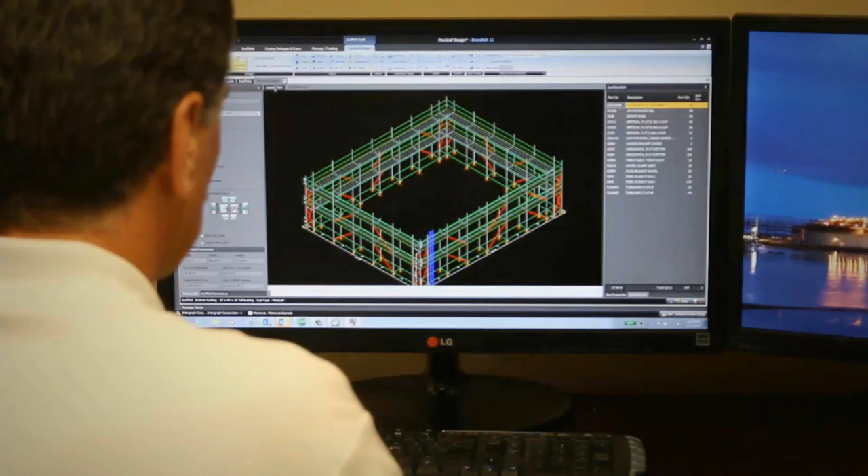Intergraph Process, Power and Marine is the acknowledged world's leading provider of enterprise engineering software, enabling smarter design and operation of plants, ships, and offshore facilities.

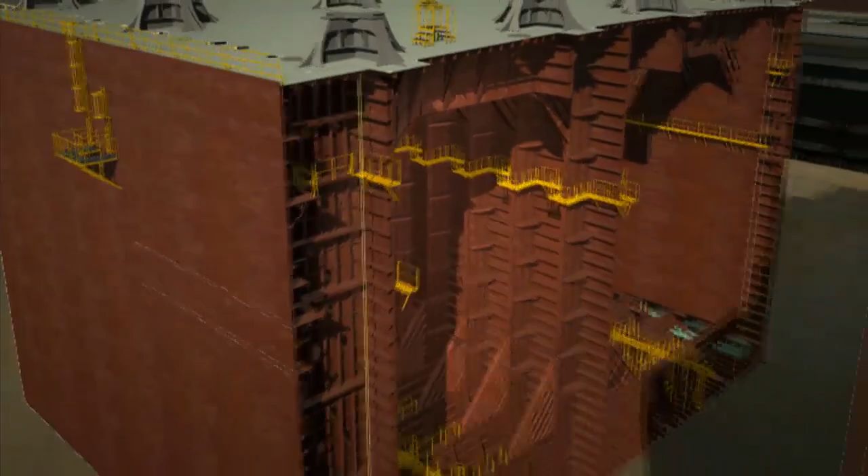At the forefront of technological advancements, Intergraph consistently delivers next-generation solutions to meet challenges, making boundaries that were previously huge obstacles seem insignificant. Intergraph helps you go beyond boundaries and create the future of engineering today.

As one of our key technology suppliers, Intergraph has factored significantly into our ability to deliver. We work with Intergraph's technical user forums, as well as jointly developing some projects with Intergraph. The idea is to have smart plant construction ready to integrate all these departments with the necessary agility and allow us to access information easily in a 3D model, which makes our management activities much easier.

The old model just doesn't work. We require an increased level of support from vendors like Intergraph to help these systems work together, to help us troubleshoot issues that may originate in systems which we don't have experience with, or that may use other third-party tools but are still required to execute the job.

From modern engineering marvels to everyday operations, Intergraph is helping our customers do more than ever before. Design efficiently, build smarter, operate safely, achieve more. Go beyond boundaries.

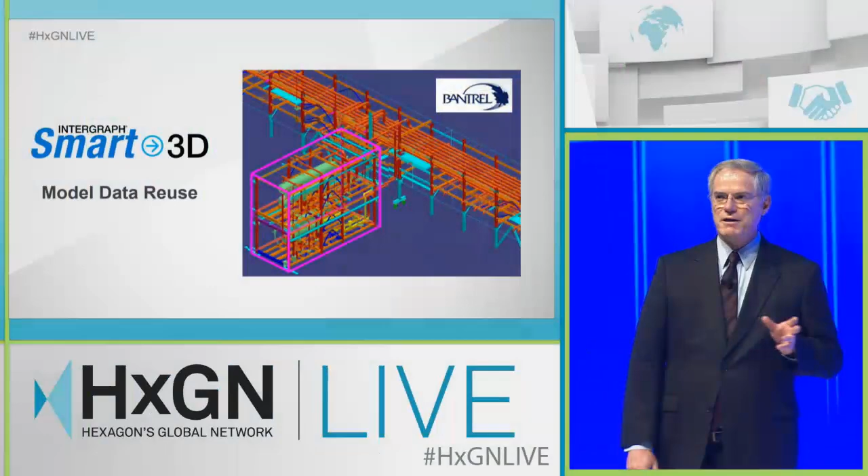Last year, we talked about Bantrel. They're a company that's owned by Bechtel in Canada. We also talked about Saipem, who's using MDR on very, very large projects to save a lot of time and money.

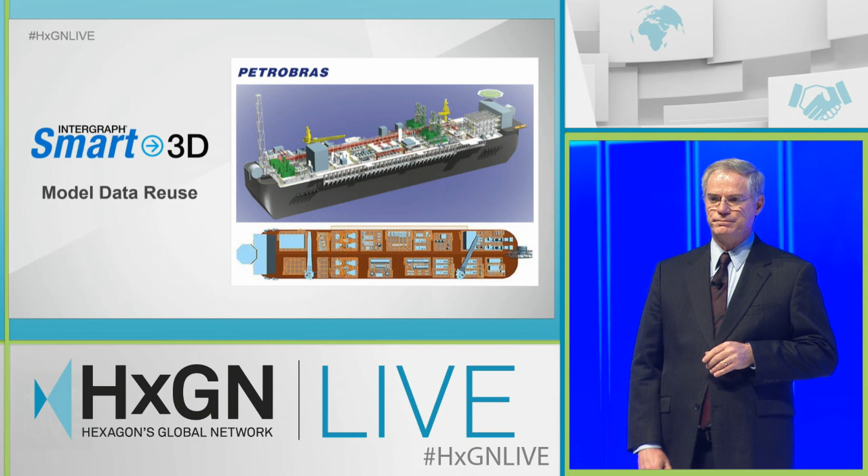Today, we'd like to talk about Petrobras. They are standardizing on Smart 3D for a massive collaborative project. Let's look closer at this FPSO project. There are 6 hulls that are similar with 6 different topsides and 80 modules. Please be sure to go see the session Thursday in room 313.

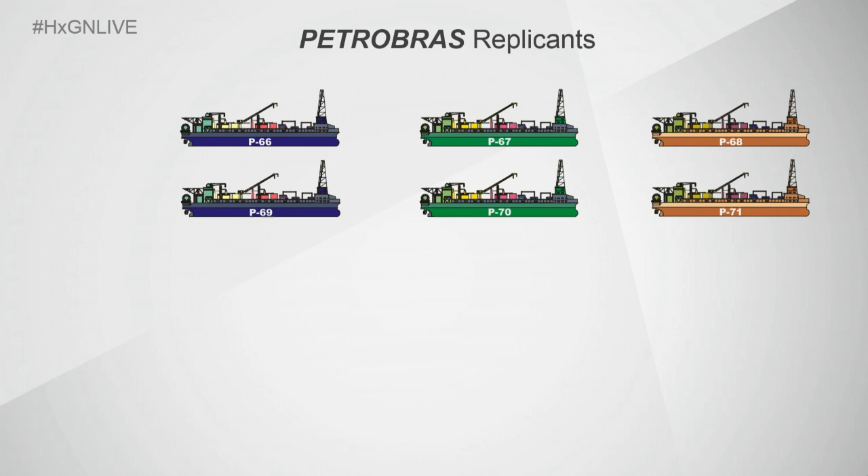These 6 FPSOs are very similar, and they're numbered from 66 to 71. And let's take a look at the contracting strategy that they've employed. First, the hull design and construction was given to Ecovix.

And then they had 3 integration contractors whose responsibility is to design and construct some of the topside modules and integrate the hulls from Ecovix, including a partnership of Keppel FELS and Promon, another one of Mendes Júnior and OSX, and the Jurong Shipyard.

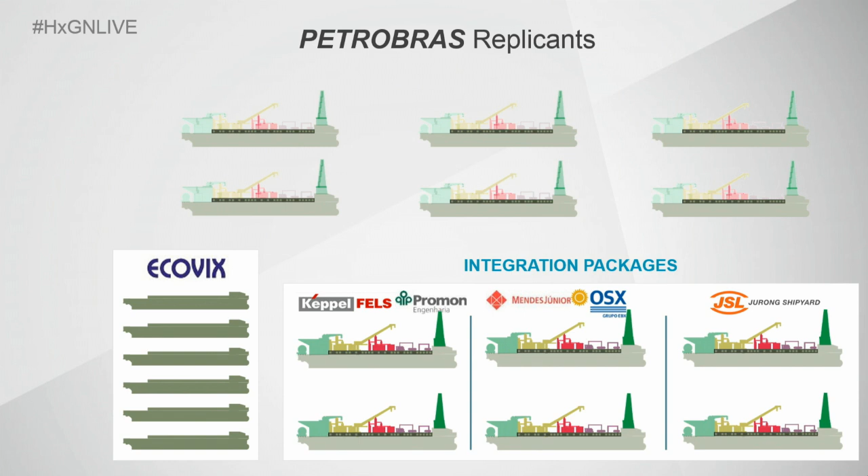The topside module design and construction were further subdivided into these EPCs, ESA, Tomei, and TKK. Now, here's where major design reuse comes into play.

The same model was used in global workshare between Ecovix and Keppel FELS. And you can see that Keppel FELS Promon designed one of those modules. ESA, Tomei, and TKK worked on their respective designs through global workshare on the same database.

And now here's where it really starts to get interesting. The second FPSO from Promon and Keppel FELS, Ecovix copied their design into the new model. And then Promon used MDR to replicate the entire topside model to the second FPSO.

Ecovix uses their design for OSX Mendes Júnior. The EPCs use MDR to create their models for the integration contractors. And those contractors use MDR to create their second vessels based on that MDR. You can see here that the combination of having global workshare and MDR together, working together, is really, really efficient for our customers.

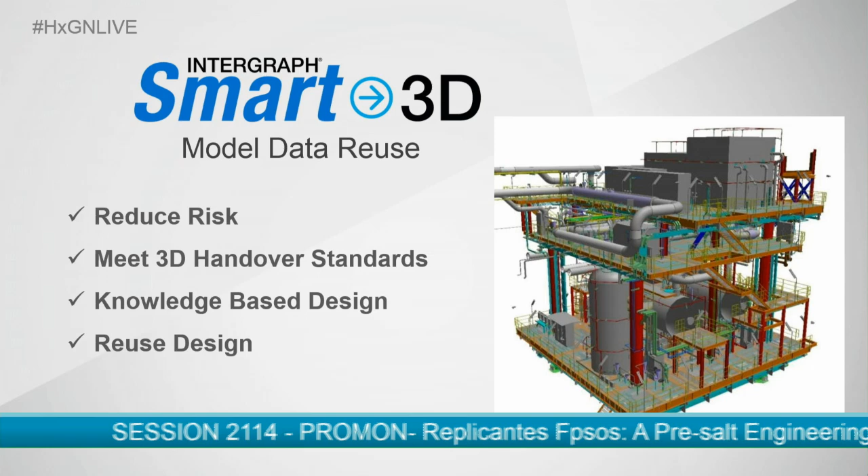What's behind all of this is Smart 3D with global workshare and model data reuse. And that's allowing our customers to manage the risk in these massive collaborative design projects.

Rogero Pinto of Promon reiterates how important Smart 3D is to saving man-hours and ensuring consistency.

So today, EPCs, several of them anyway, still switch 3D design system from project to project. Sometimes they switch because of a particular project type. Maybe it's offshore and oil and gas, and they switch between those two. Sometimes they switch because they have a particular location that got the job, and they have expertise in a specific system. Or sometimes they switch because that's what the owner is requesting, is a particular deliverable. All those are historic reasons why they kept multiple systems. But is that really necessary today?

What we saw last night was the Red Bull race team. It was pretty incredible. You know, if you blinked, you missed it. They had a pit stop, and because everybody was focused on that one type of car, it was unbelievable. They set record time at that pit stop.

What if you suddenly changed their car out? Do you really think that they're going to be as performant? Definitely not. Instead, they remained and have a focused expertise on a single car type. And that is what allows them to optimize their people and their work processes to get the very highest and best performance possible. They have that continuous improvement that they use on these cars from race to race and year to year, and they get better and better at it.

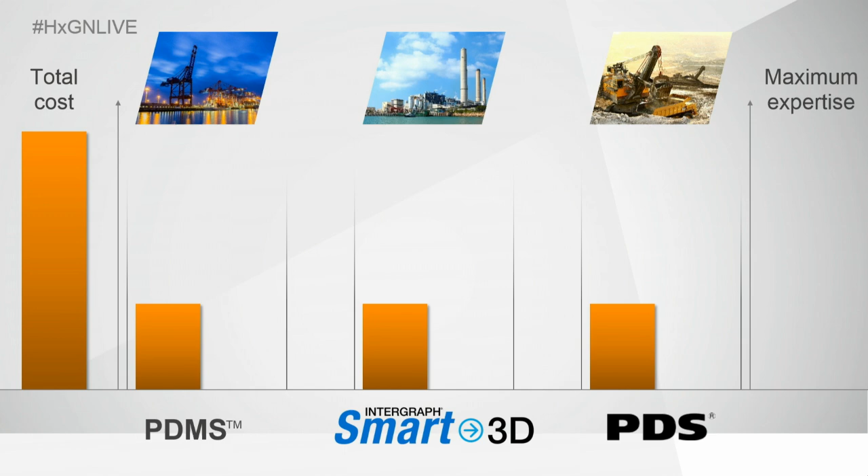Additionally, you've got to train people on that, and that's ongoing training cost. Many people don't invest in additional follow-up training, but you really should, because we're adding capability all the time. And if you aren't getting that follow-up training, you're missing something.

Also, you have IT costs that go up, because for each one of those platforms, you're going to have your own internal systems that you need to integrate with, which means you're going to be creating all of those integrations yourself, and you're going to have to maintain those going forward, doing multiple of those all the time.

Additionally, unlike racing teams, you have your best people spread across multiple 3D platforms. That means you're really not getting the efficiency opportunities out of all of your people, like defining the best rules for your system, getting automation in place, optimizing your work practices, and also that continuous improvement that you can get from all of your global organization, really focusing on one set of tools.

But if you focus on Smart 3D as your single design platform, you can change that. Your costs will go down, your efficiency and your experience and your knowledge are going to be able to go up, and this is from a global perspective. And you're going to have opportunities for a lot more success than you've ever had in the past.

Smart 3D as your single design system, along with SmartPlant Interop and our export capabilities - if you use those three things together, you can join other people that have made that switch. Agility Group, they've been here, they made the switch to a single design system about 4 years ago. They've spoken at this conference every year for the past several years and told you of their experience.

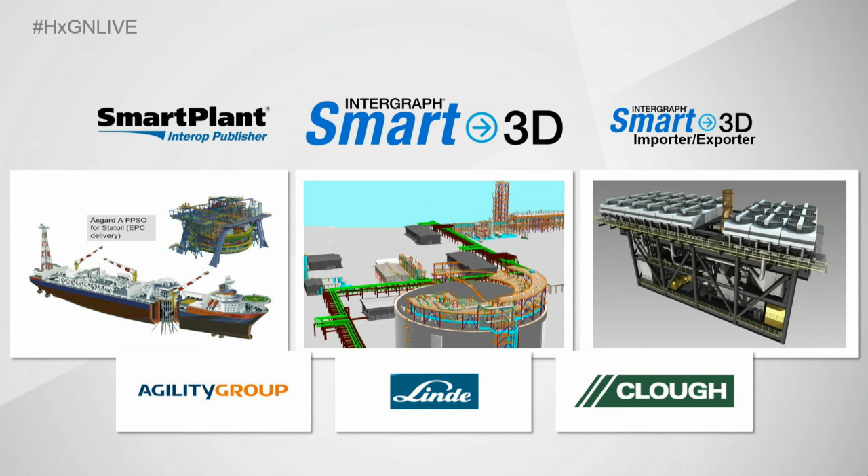Last year, Linde from Germany spoke. They used Smart 3D as their detailed design, but then handed over in a different format to the owner-operator at the end of the project. And this year, you're going to be hearing from Clough, who has made the decision to switch to Smart 3D, and they started that last year.

Clough's portfolio of products and expertise consisted of a number of products that you see listed. Like many of you, Clough wanted to leverage their existing data and designs while moving to Smart 3D at a pace that worked for their organization.

In their first project, they actually received the feed model from a different EPC that used a different design system. Now, in this case, the delivery did not include things like specs and those types of things, so they weren't able to do a full translation. But they were able to use SmartPlant Interop Publisher to leverage all of that information into Smart 3D and use it as a reference so that they could do their detailed design.

Additionally, they use legacy designs, reusing data from legacy designs, and some contractors use different tools. Again, they were able to use SmartPlant Interop Publisher to bring all of that information in - the graphics, and more importantly, the data. You've invested in that data. With SmartPlant Interop Publisher, you can bring that data forward as well and use it as a reference as you continue to do design. So Clough continued to do their development of the design in SmartPlant 3D, but they were able to leverage all of that great information that they had, either from their contractors or their legacy data.

So a side note, kind of, but I think it's really important. From an efficiency standpoint, the models that got converted using SmartPlant Interop Publisher - the exact data and graphics can be used directly by all of our other products. So if you're using the Enterprise, this is going to bring the cost down because you'll be able to use all of that data in all of our tools.

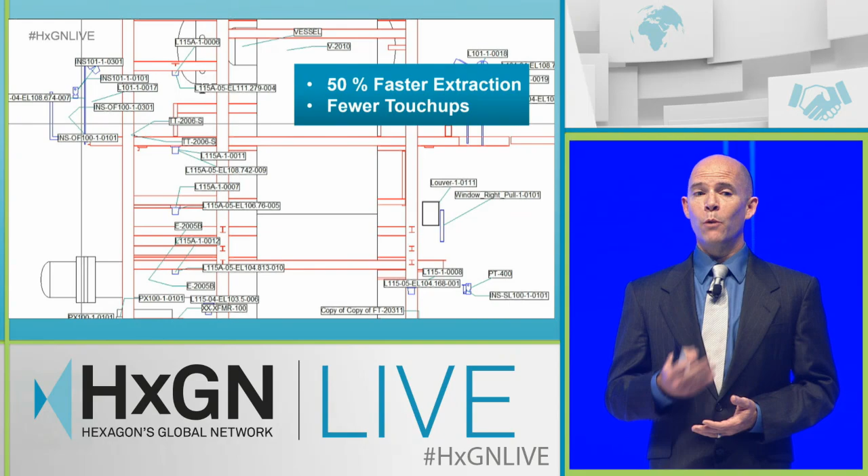In addition, one of the major changes was the full upgrade to 64-bit, and we now have 50% faster extraction on drawings. If you see the new version of Smart 3D, you're going to see hundreds of small improvements made to remove these touch-up efforts, and I'd highly encourage all of you to take a look at it.

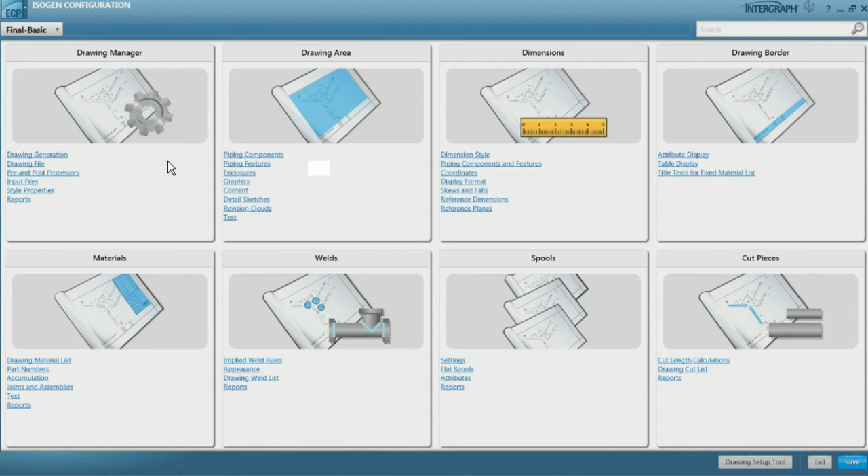Another change we've made at the behest of many users, particularly executive management, is to begin looking at how we can reduce cost of ownership. Specifically, we focused our UX, our user experience design teams, on the administrative functions of some of our applications. Isogen has been the first one to execute this and release.

If you look at the newest version of Isogen, you'll see an entirely new administration module that is all graphically driven. It's very intuitive, so there's no typing in of secret codes or anything like that. Everything is documented within the software, so you don't need to go and read documentation - you can see graphical depictions of each different type of choice you would want.

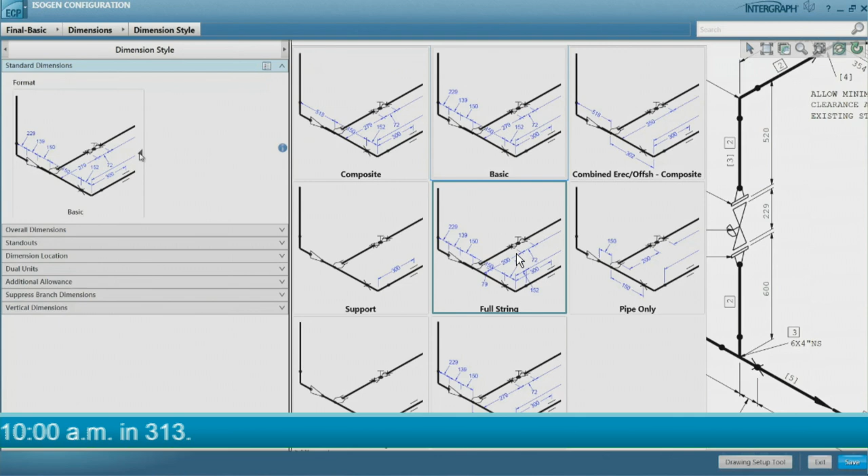There are many, many choices, as those of you who deal with drawing configuration know. For example, with dimensioning, you could choose composite dimensioning, basic dimensioning, or full string dimensioning. Once the administrator chooses one, you can apply it to the drawing and see what the change will be, to determine if you'd like to keep that or go backwards. This makes it very easy - it doesn't require so much work from the specialist. They can focus more on the quality of what they're doing and less on how to operate the software.

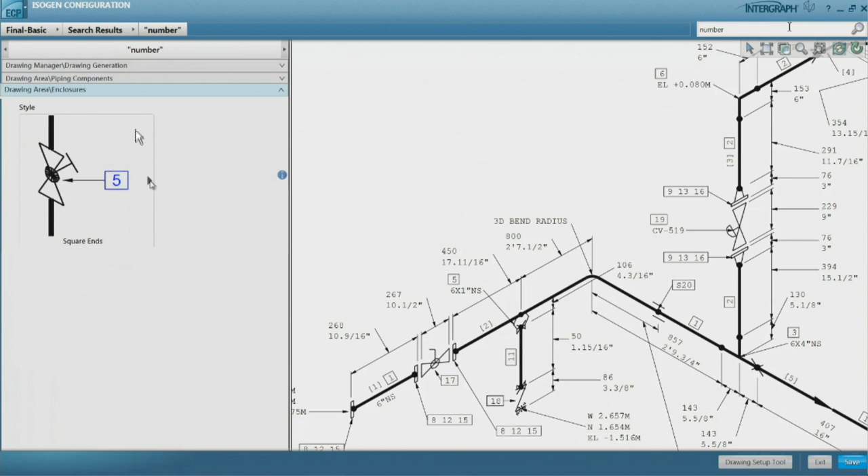Likewise, another example was the way they changed the numbering. Numbering styles can be changed, again all graphically, and then the user can simply decide if they want to commit to that or not. One of our clients, Cesar Matos, said it perfectly - they expect their configuration costs on drawings will go down by 25%. In other words, they can do it 25% faster as a result of the investments we've made to reduce cost of ownership for our clients.

Recently, owner-operators told us that 90% of the projects they award are below $10 million. For these small to medium-sized projects, customers face the same pressures that the larger ones do - tight deadlines, squeezed resources. They are required to deliver high quality, on time, with accuracy.

In this example, Richard Design Services designed a 10,000 barrel a day facility. This was the largest renewable diesel facility in the United States, and they used CADWorx, CAESAR II, and SPI. They were awarded the Drivers of Success Award from CADWorks.

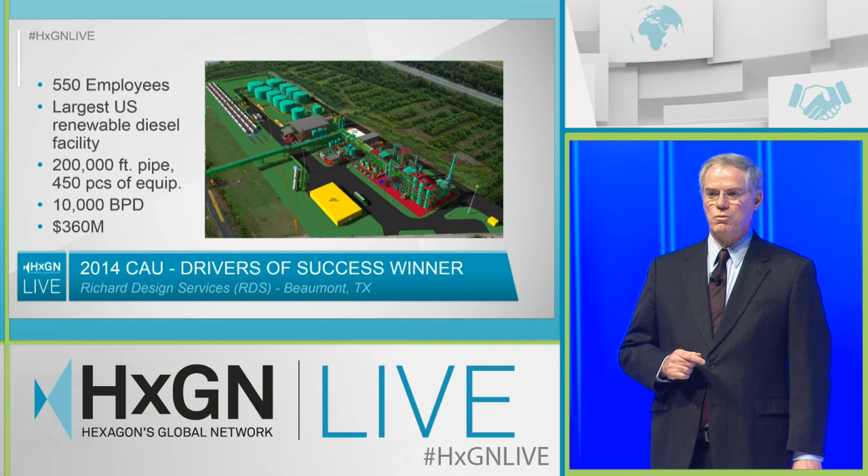Michael Tran shared how they reduced their project engineering time by one-third using CADWorx.

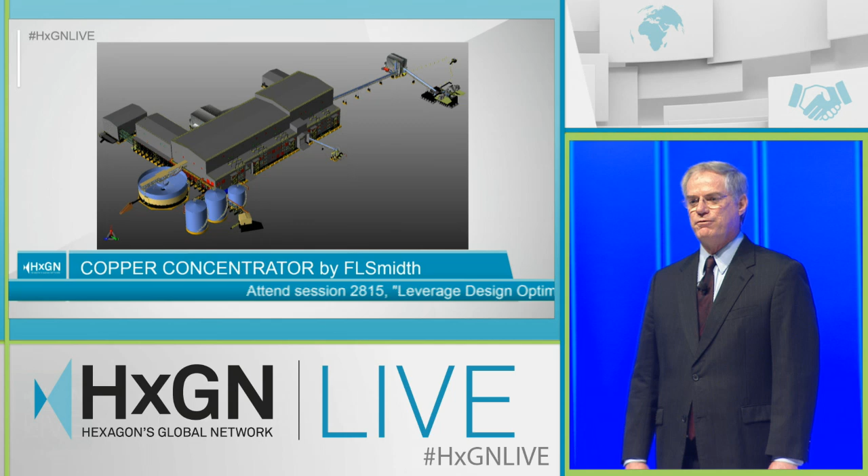CADWorx is a great tool with applicability in many different industries. FLSmidth uses both Smart 3D and CADWorx on their mining projects where appropriate. They're also a winner of the Drivers of Success competition and have been working with us for many years, so they know the right time and place to use the capabilities of CADWorx and Smart 3D on a project of any size.

Javier Barros shares about their success with CADWorx, and how the flexibility and adaptability has significantly helped their profit.

Smart Plant Enterprise Master Tag Registry is a new integration product we're releasing that we've been working on. We think it's going to really improve your business, especially given the interest EPCs have shown in this product so far. This week you'll hear about our full vision for MTR.

We're going to release it in a phased approach. It's currently in beta with our premier partners, and we expect to release it in October of this year.

I think we can all agree that managing tags and their data is critical to any project's success. We also know there are significant challenges in doing that because project size and complexity have increased, and the timelines to get it all done have certainly shrunk. Consolidating and managing all that change is complex and time-consuming.

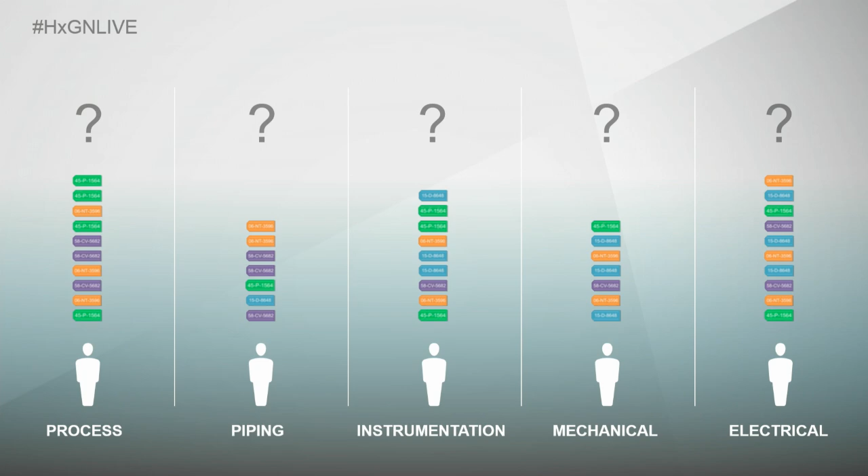Today there are some very difficult questions that are complex and hard for you to answer. Who owns what? Who's changed what? What tags are no longer valid, obsolete, or have changed? And without consistent tag numbering, can you really track progress like you want, or manage materials, or even effectively coordinate changes between your departments or disciplines?

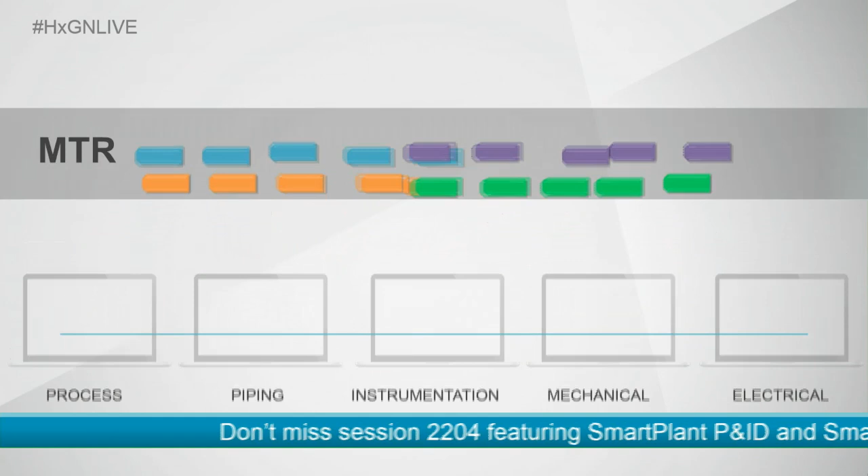Smart Plant Enterprise Master Tag Registry is going to help you answer those questions a lot easier than ever before. Master Tag Registry collates and organizes your tags created by all parties into a master registry, which becomes your single source of truth on any project. It's accurate, consistent, up to date, and accessible by everyone on the project.

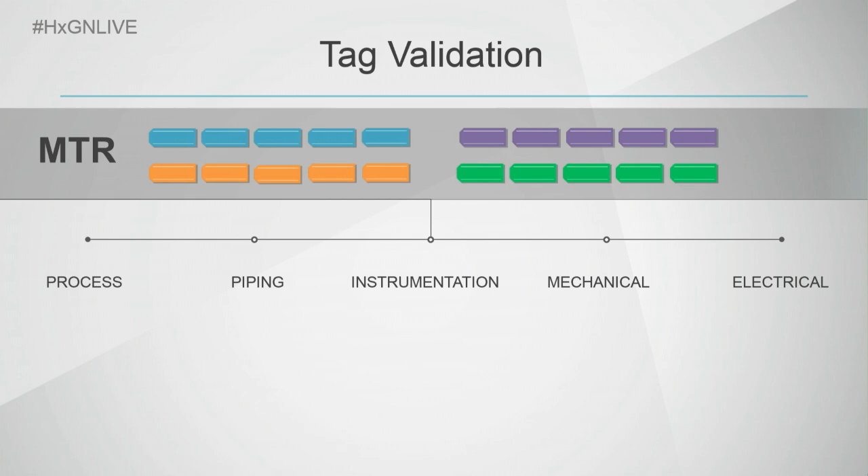With our automated tag validation, you'll be able to check for inconsistent, obsolete, and renumbered tags, and the system will help you correct those. As the enterprise is used, the handover information is collected and ready for handover.

Project engineers and leads can easily track their progress and the number of tags that have been created on the project.

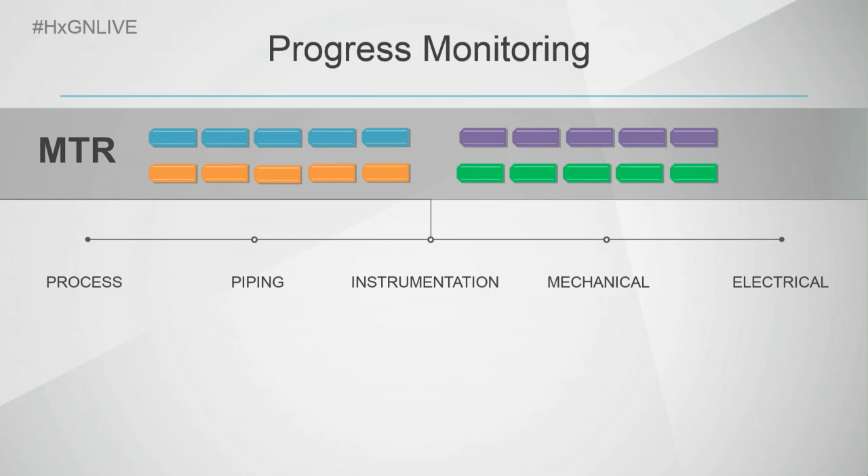Companies like yourself actually helped us put together the business case for this and the likely savings you're going to have by using it. If on a project of this size you assume that 5% of your tags are done incorrectly, then the potential savings are really significant.

By reducing time to correct tags, you're going to save around $400,000, over $250,000 due to less time spent looking for tags. And because Master Tag Registry creates an automated register for you, that's estimated at $900,000 in savings. So conservatively, you're looking at a total of about $1.6 million in savings. The story is pretty compelling.

Thank you, Melanie. Now I'd like to talk a little bit about visualization, something Intergraph is well known for in the industry. We've worked with you for many years to create visualizations long before those real assets exist out in the field. Those have been used in a wide variety of work processes, from pre-sales of asset concepts to executives when the project is still being sold, through design so people understand the overall layout of a plant or facility, operations and maintenance walkthroughs, constructability walkthroughs, and even during the operations and maintenance phase.

I think it's fair to say that if a picture is worth 1,000 words, a good 3D visualization could easily be worth $1 million. Not that we're making any suggestions on pricing, by the way. But it is very powerful at getting lots of people to understand the same concept at the same time.

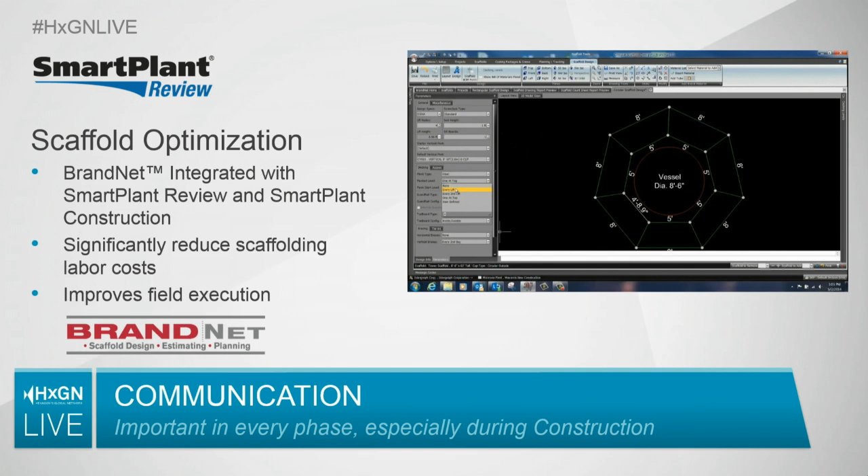Another area where we've had innovative success with visualization was working with a company called Brand. Brand is actually not a software developer at all—they do scaffolding for a living, a scaffolding contractor. They have an in-house system called BrandNet, which is how they do the detailed design for all their scaffolding so that when they go out in the field, they have all the right materials and everybody knows what to do.

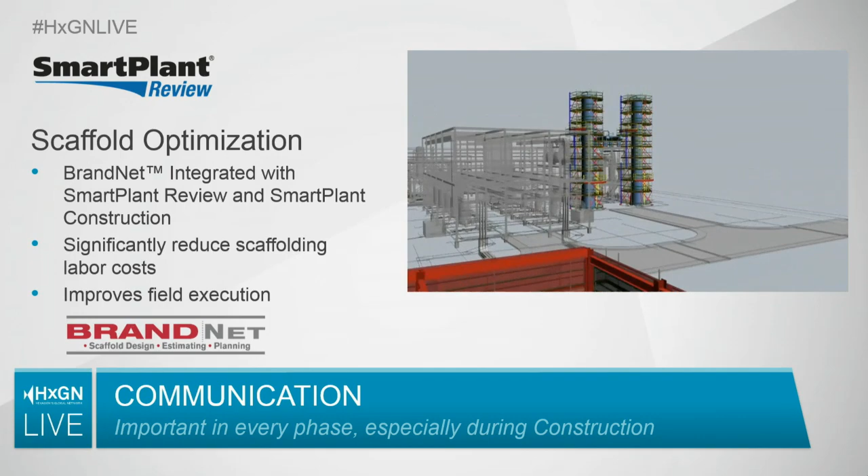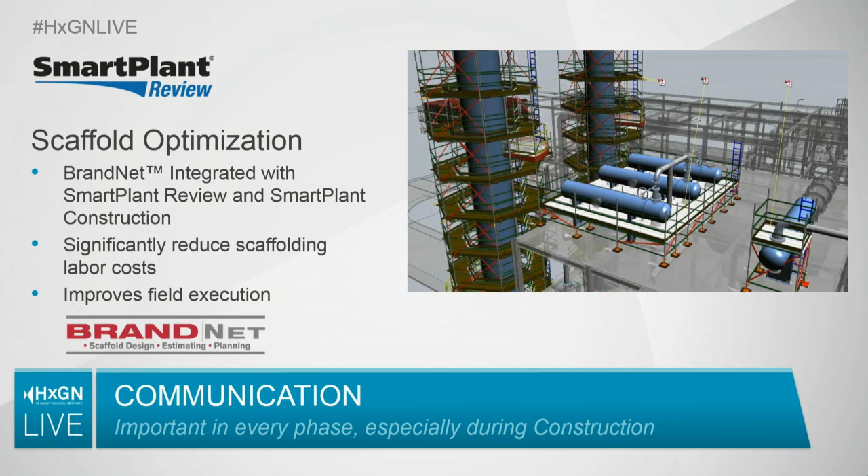They use Smart Plant Interop so they can work with their customers, the main contractors, to publish those scaffold models into the master model, so the crews can see the whole thing laid out together—how that detailed scaffold model fits in with the intended full-size 3D model. This helps crews be more efficient because everybody understands how it will all work together, and it improves safety because when everybody knows their job, it creates less risk out in the field.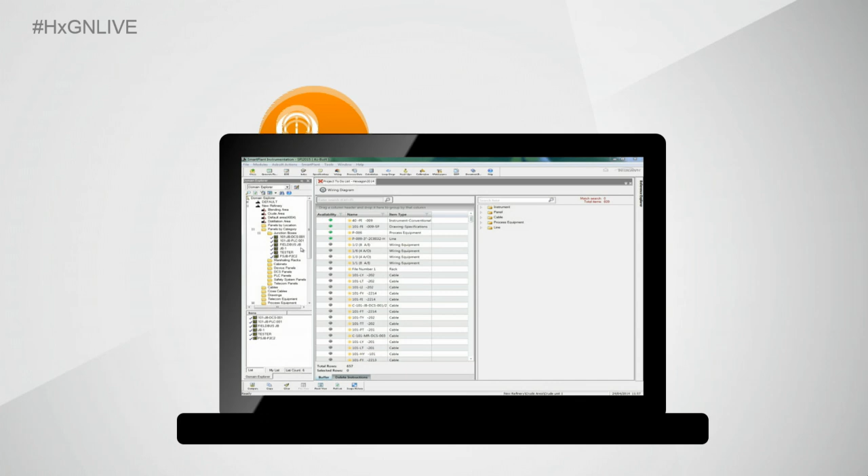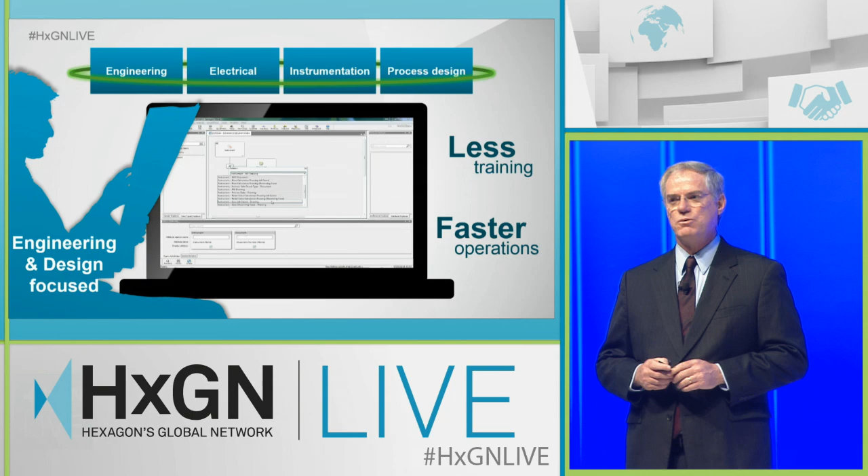Now let's take a look at the work we've been doing on SmartPlant Electrical and on instrumentation. As Patrick talked about, we're focusing on user experience, and in particular in the E&I area, we've worked on making things easier and more intuitive so you can find, create, and edit data. This update has been driven by an engineering approach rather than an IT approach, so it'll speak the language you understand. We're looking to harmonize tasks across the different applications in the schematic suite so you just need to learn things one way and one time.

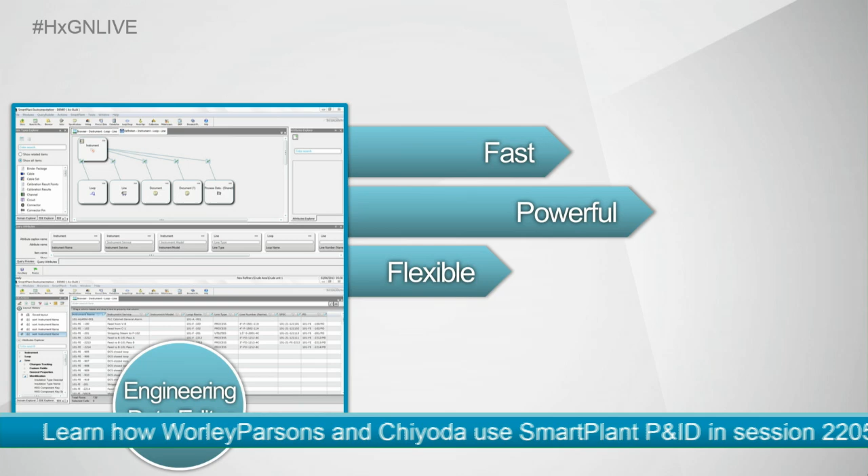We've added a graphical query builder that speaks the engineering language and allows you to graphically and intuitively lay out the information you want to see. We've also extended the engineering data editor across the suite, providing powerful editing and searching that works just like Excel, with sorting, filtering, and cut and paste.

We've been listening to our electrical customers who had requirements for case management where they needed to work for safety and design reliability on different conditions. So you can now look at the startup case or the shutdown case and keep track of those.

We've also added the ability to manage changes at the component level. And we continue to provide support for analysis of your design by going through our integration with ETAP.

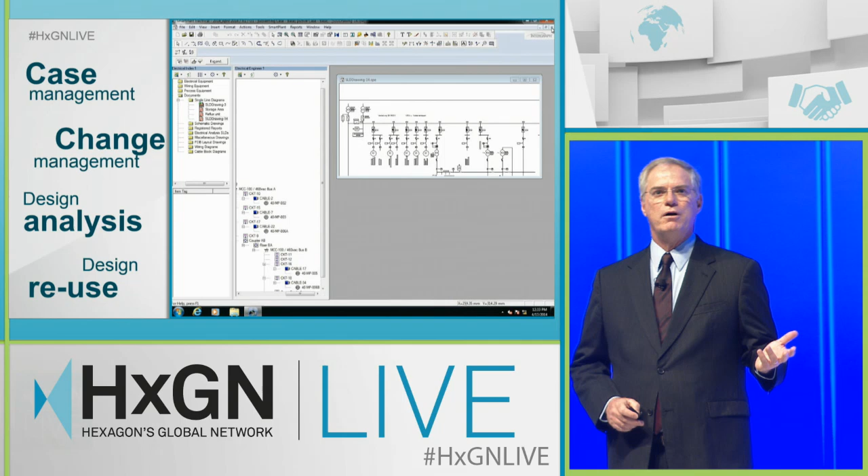I'm also excited to announce a new graphical environment for SmartPlant Electrical. This graphical environment allows you to create complex deliverables and even do design reuse from legacy CAD systems. So if you have a drawing from AutoCAD or MicroStation, you can cut and paste that into SmartPlant Electrical. And then you can take those dumb graphics and turn them into intelligent electrical circuits. We're really excited about this whole capability and tying things together in such a way.

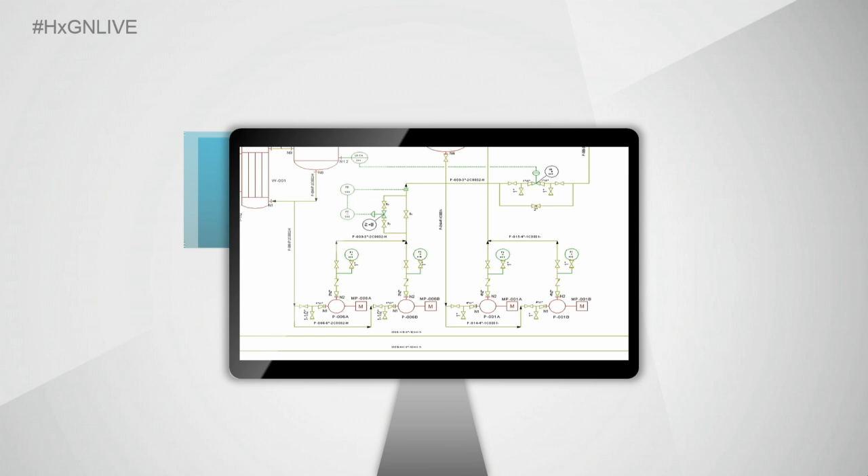These enhancements across the schematic suite are allowing us to focus on task-based engineering, where you can focus on specific tasks that you're working on. We provide excellent integration across all of these tools, across the schematic applications and feeding into 3D design.

And to do that, we've enhanced the to-do list to make it much easier to manage the changes that you make.

Because our applications are data-centric, and because we have a rules-based design engine, you can make the right decisions early and eliminate costly mistakes that could cause serious consequences downstream.

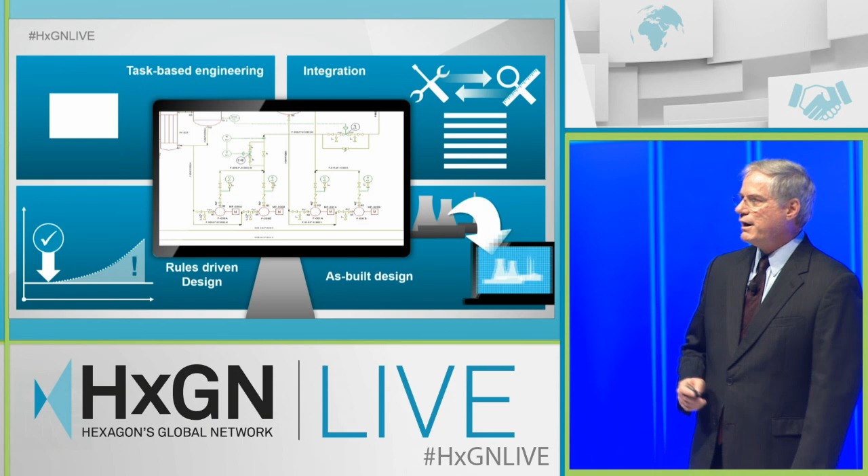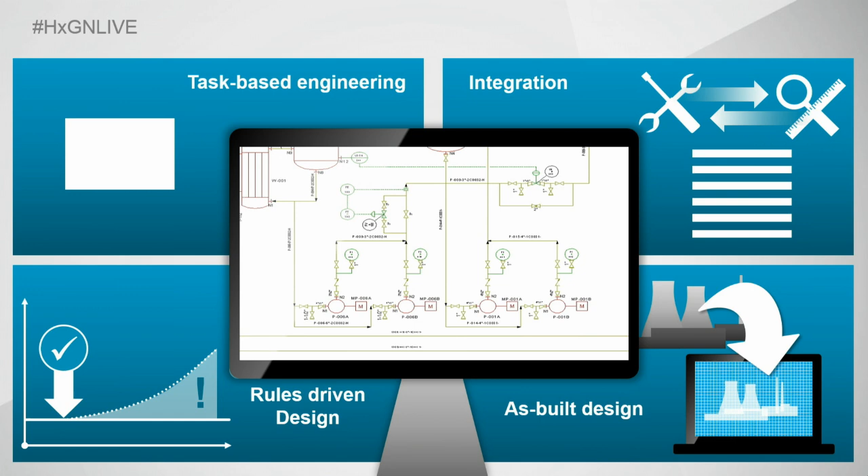One of the key differentiators of our schematic solutions is the support of parallel maintenance and capital projects. This allows you to maintain an accurate as-built definition while you scope long-term and short-term projects and work on them simultaneously. Then once those projects are complete, you can merge them back into the as-built to maintain an accurate record of what you have on the site.

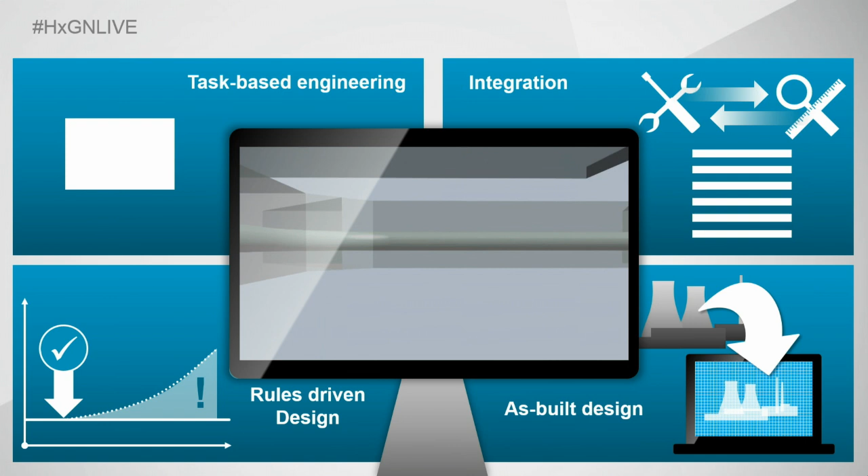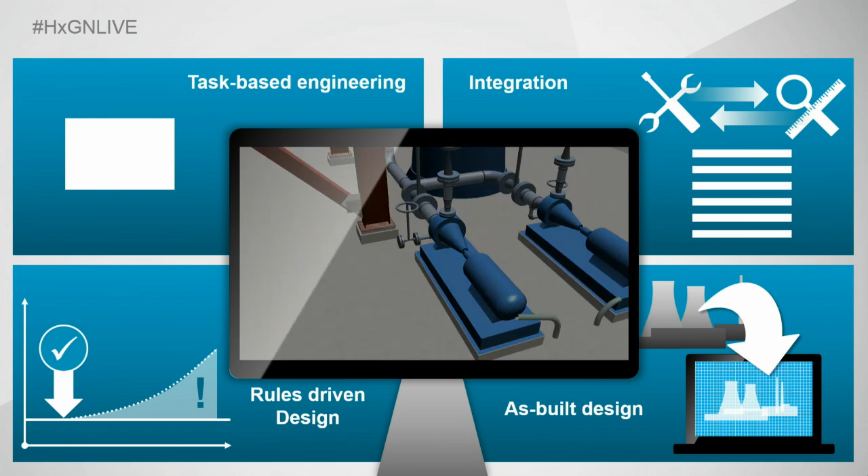All of these capabilities facilitate an efficient design that ultimately drives the physical design and is used in construction and operation of the facility. This Smart 3D model you see here was developed from SPI, SPEL, and P&ID model. It was then taken and integrated into 3D so that we could have an accurate and consistent design from initial design all the way through detailed design.

One of the best things about this conference is getting to hear real stories from customers like yourself about how our software has helped you improve your business. We really like that, it's one of the best things about coming here. And one of those stories came from Doosan Heavy Industries.

They recently used a new work process to take advantage of SmartPlant's consistency checking between SmartPlant P&ID and Smart 3D. Doosan Heavy used this capability on an extension to the Rabigh power plant in Saudi Arabia. After the project, Mr. Lee stated that by using integration, they were able to reduce errors and have much better data integrity now, and because of that they're going to be using the consistency checking work process on future projects.

We really do understand that harmonizing your people with the work process and technology is the best way for you to gain an advantage. When you start integrating your disciplines and applications with new work processes, though, we do understand that it's not just about great software. You must have great and strong work processes. And sometimes that work process definition and actually changing your organization can be the most difficult part.

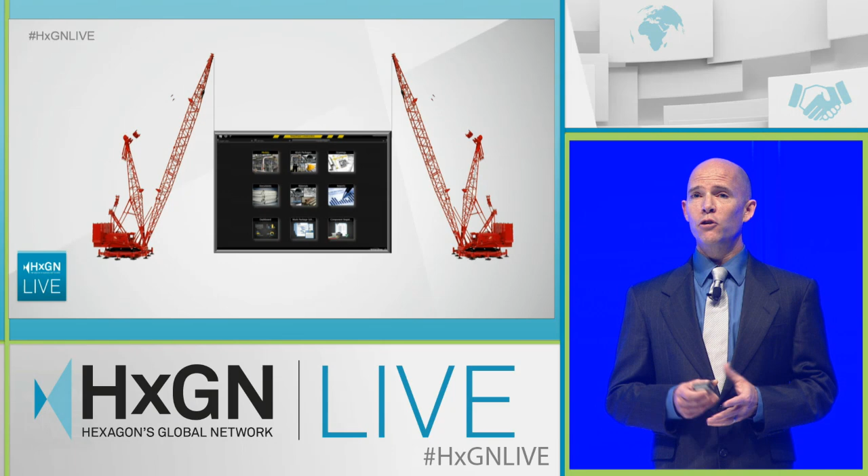The one thing we've learned speaking with many constructor companies around the world is that they're very interested in the fundamental question about time on tools. In other words, how much time on a project are the craft people actually using the tools they're supposed to use to construct, rather than doing other things?

There have been many field time surveys that have looked at this problem. They all say approximately the same thing, which I'll summarize here. About a third of the time of construction personnel is spent on direct work time or tool time, using welders or paint machines or cranes or whatever they were supposed to be using to construct the job for the client.

Approximately another third of the time is what they call variable time. This is everything else: getting safety permits, safety training, logistics to and from the job, moving materials around, break time—all of those things are variable time, required for the job, and may change somewhat from job to job or client to client.

But disturbingly, another approximate third of all construction personnel time is spent idle and waiting. Now, all of that idle and wait time could be converted from idle time to profit. And that's what constructors really want to get—how they can improve that so they can shorten project schedules and turn that idle time into profit.

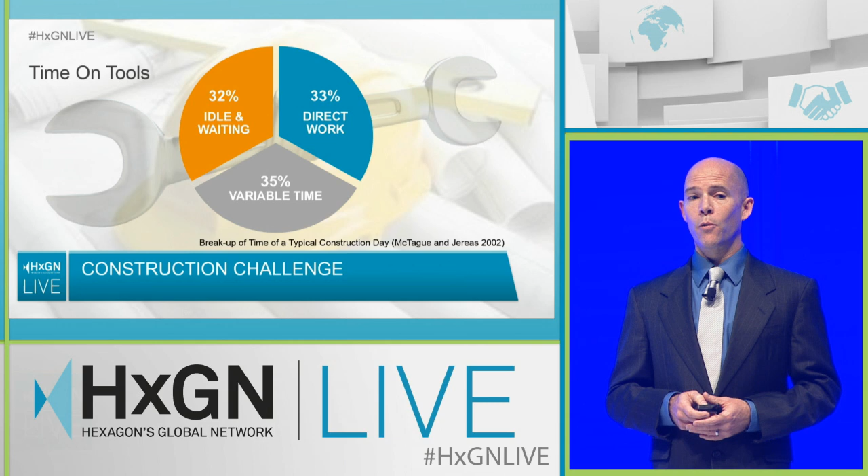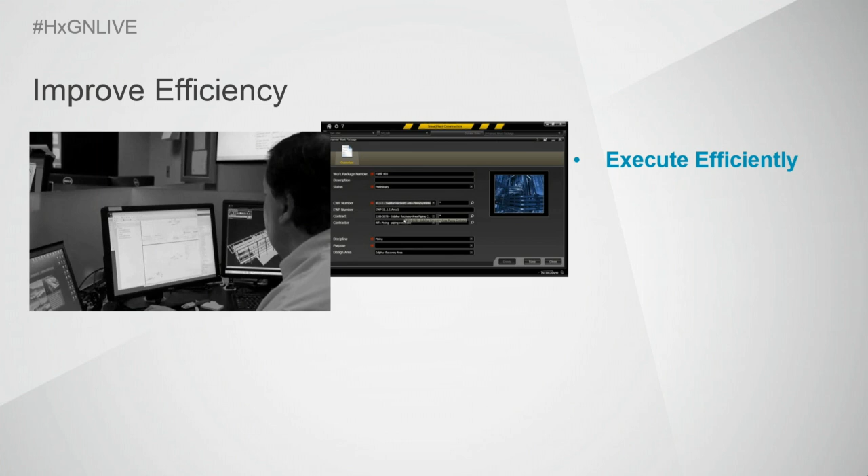We've been working with many constructors around the world to get a view of what it takes exactly to improve efficiency of execution. By far, the first thing every executive tells us is they really need to execute efficiently day to day. That means every work crew has to have the information they need, the materials they need, the tools and resources they need, all in one place with the correct expectations and ready to go at the right time. Without that basic capability, efficiency is extremely difficult to improve.

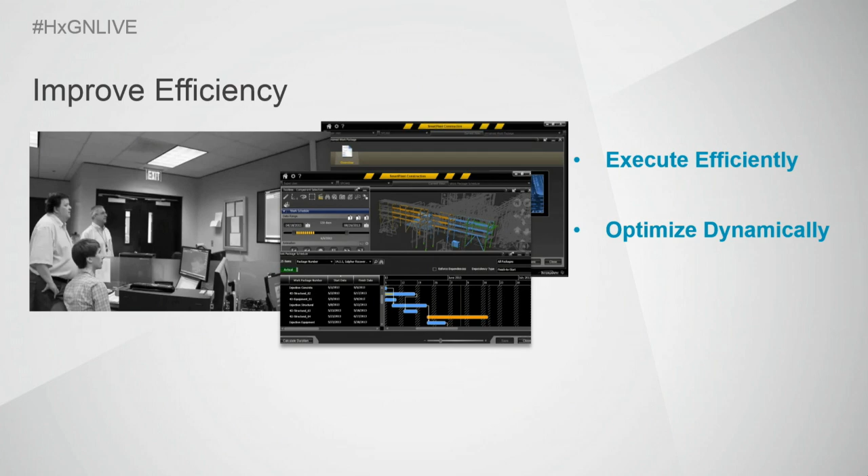The next thing they'll tell you, particularly those with experience in the field, is that you've got to be able to dynamically optimize. Everybody in construction knows things happen—materials don't show up, materials are mislabeled, cranes break down, people don't show up. There's all sorts of things that happen, so on-site crews have to be able to dynamically optimize to make sure they're making the best use of the resources they have every single day, in order to reduce that idle and wait time and improve results for their clients.

Third, you've got to be able to track progress. Tracking progress is critical for a couple of reasons. First, constructors usually get paid on some basis of progress, so they care about progress tracking a great deal. Second, without an accurate view of progress, it's easy for an executive to become lulled into a false sense of security until late in the project when it's too late to make changes, and then they find out where they really are versus the optimistic reports they had in the past. So tracking progress is important.

And then finally, documentation. I've got lots of good things to say about construction people—I've worked on construction sites myself in the past, and they're usually really good at construction. Documentation is usually not the sweet spot or strong suit of construction people. That's where Smart Plant Construction helps, by pulling all the documentation together in one place, in a simple, easy-to-use format, so that we have it the right way, with our standard documents all organized.

And this really helps the result of the project in the end.

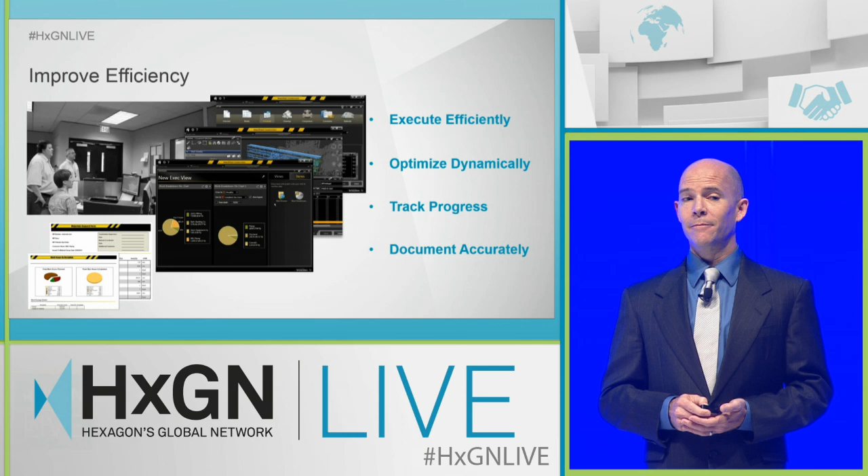Now, that's one thing to talk about the technology concepts, but I think people must ask, so what's happening in reality since the launch in 2009? How many people are really doing this? Well, we're very encouraged by the results.

We're seeing interest across all industries and around the world. The process industry has seen many clients who have engaged with Smart Plant Construction to improve construction. Likewise, when you look at mining, the mining industry has also seen the great opportunity here by effectively planning people and resources and process how they can improve efficiency and assure the delivery of their capital investment.

Now, it doesn't stop there. Even the power industry. Many people think that the power industry is very simplified and maybe doesn't have so many problems, but they actually have very similar idle and wait time problems as all of the other industry construction projects. And we're seeing power industry contractors begin to focus on this.

And then finally, offshore and marine is no different. It's a very basic concept, getting all the right resources, the people, materials, and process at the right point and the right time so that people can execute effectively.

So we've seen some great examples like Fluor, one of the largest constructors in the world, engaging on Smart Plant Construction so that they can begin to streamline their execution and improve their execution efficiency. Likewise, in the offshore and marine space, clients like Sapura Kencana have engaged with Smart Plant Construction to ensure the efficiency of their yard operations so that they have less idle and wait time and become more efficient at executing their projects for their clients.

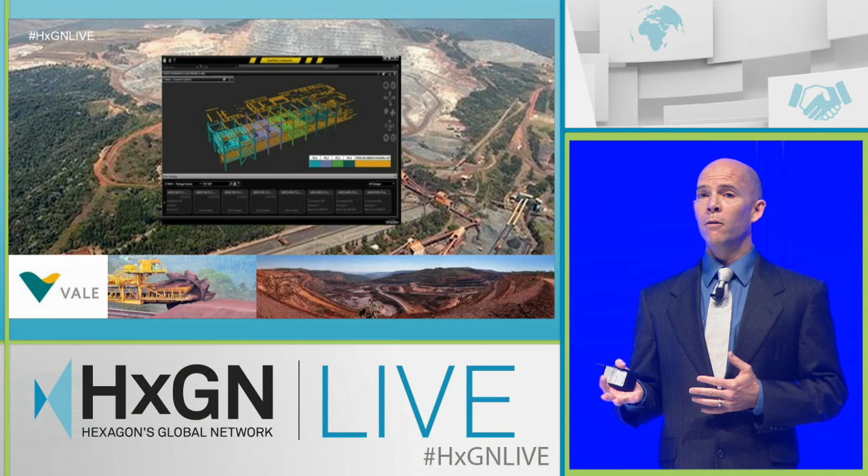It's a very exciting project in that it's going to be a truckless mine. In other words, they're going to use shovels, conveyors, and rail to transport all of this stuff several hundred kilometers so that they can bring their product to the dock. This railway project means that we have to plan in detail by rail segment to ensure that construction goes effectively and they can finish their project on time.

This is called the S11D, or Serra Sul project. It involves over 700 kilometers of railway have to be put in place in order to make this project work. So they have railway all the way from the mine site, the truckless mine site, all the way up to the port where they will eventually load and sell the iron ore that is being produced.

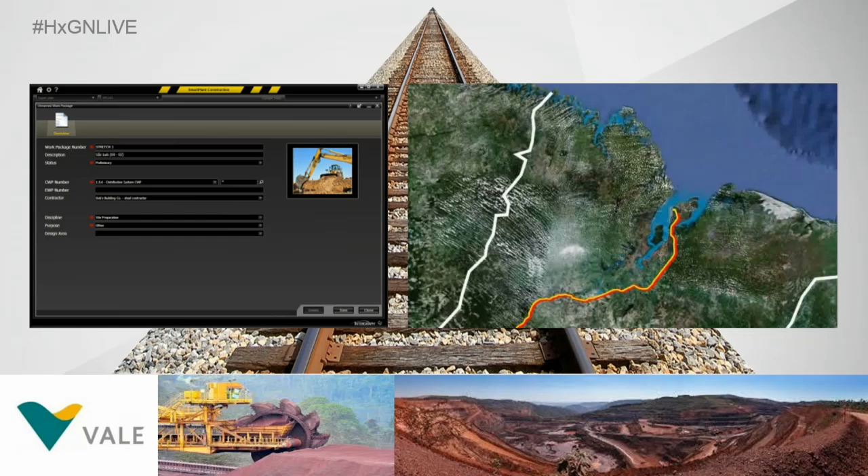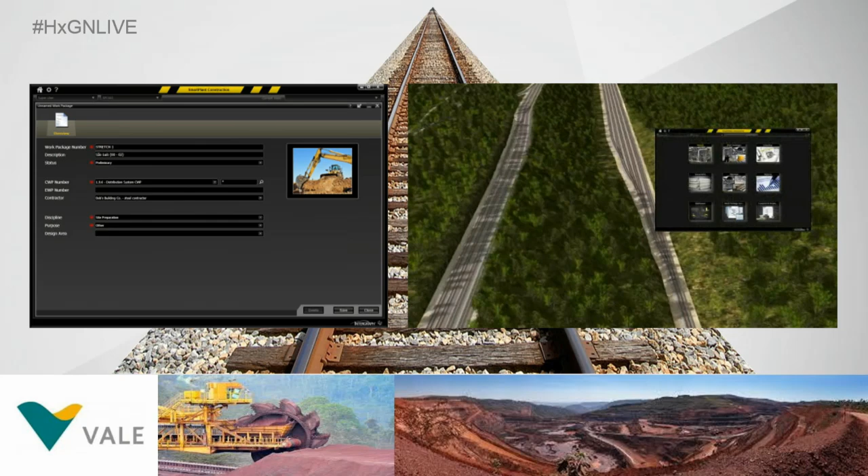All of this work is being done and planned with Smart Plant Construction. It's a massive project, as you can imagine. It has a value of approximately 20 billion dollars. So it's a very large iron ore project, and when it's done, will be one of the most impressive iron ore mines in the world as a result of the truckless technology they're deploying.

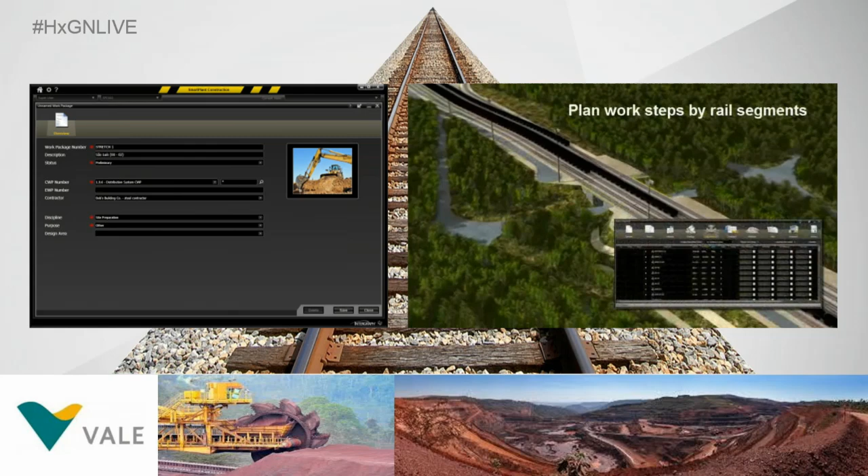All of this is being done where we use Smart Plant Construction, and they're planning by rail segment to ensure that they have the right people and the right materials and the right tools at the right time. Because they're operating out in the middle of the jungle. You can look on a map, all of this is very wild area, and so it's critical that they show up to the job site with every single thing that they need and ready to work. Otherwise, they'll have idle and wait time.

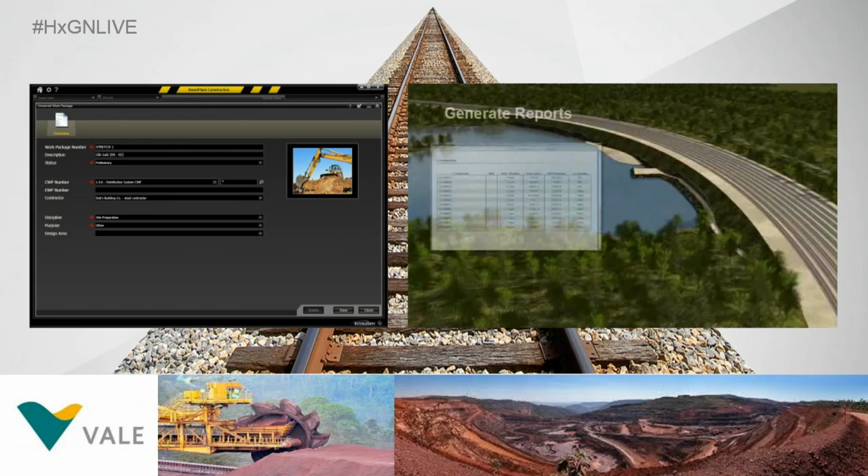I think Luis Andreda said it best when he talked about our work with them in Smart Plant Construction. They really see this as a critical piece of their work process to assure effective delivery of that project, and we are very proud to be working with such an aggressive and innovative company like Vale.

Thanks, Patrick. That is really impressive what they're doing with Smart Plant Construction. Let's shift gears a little bit and talk about materials. We've made some great strides this last year, and we're working on some exciting things that I'd like to share about. Smart Plant Materials is used by over 400 clients worldwide.

About $200 million worth of material are managed through Smart Plant Materials every single day. Every one of these customers interfaces with a lot of different suppliers to get pipes, valves, pumps, tanks, steel, and all the other items that they need. There's a lot of complex information flowing back and forth. Unfortunately, a lot of the time this is in paper and emails that can give the wrong information at the wrong time.

Well, we've solved that problem with our supplier portal, providing direct access. Suppliers and subcontractors can update their own data to ensure that it's accurate and up to date. We're excited today to announce that Smart Plant Materials is being given a new user interface that's much easier and simpler with improved performance.

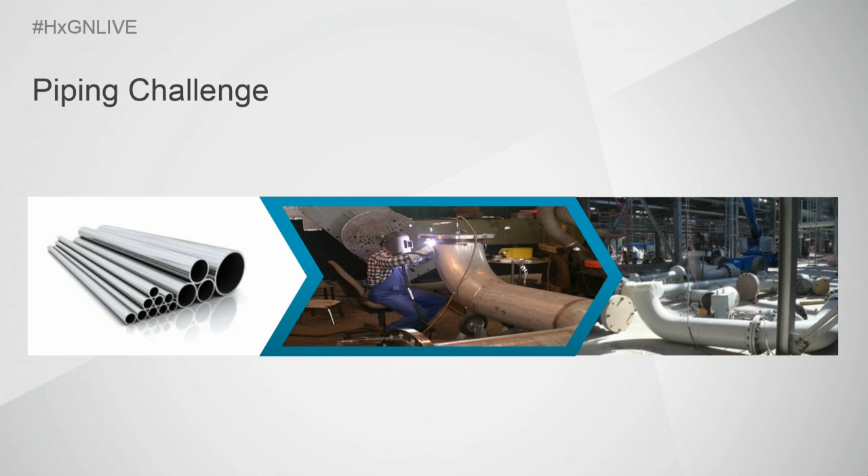However, when you start layering on some of the other challenges, like all of the different engineering standards, quality assurance standards, project schedule requirements, priority and sequencing needs, then it starts to become a bit more complex. It even gets worse. There's a wide array of documentation, all paper documentation done manually, that's required in order to enable this basic process to deliver spools and have them be constructed effectively and be accepted by the client.

As a result of all of that other stuff that surrounds the job, you could have people who are very good welders and very good fabricators, but they may still fail unless all of these other things are taken care of.

Just to review for those not familiar: with our traditional approach, someone starts with a 3D model, a contractor issues something called an issued for construction isometric to a fabricator. For many of you in a large EPC, that may be where the world ends, but I'd like to show you what happens on the other side of that IFC isometric.

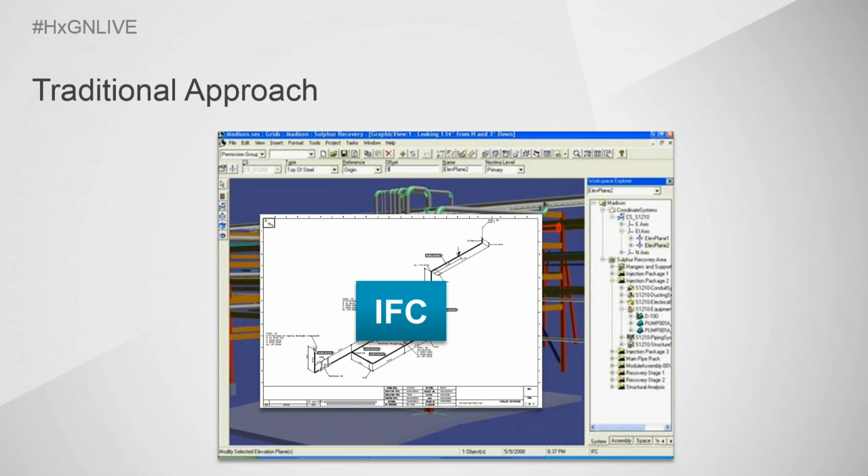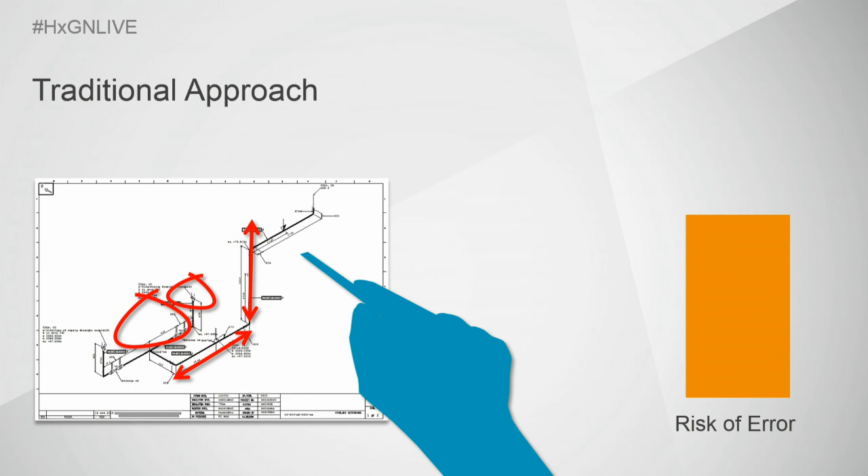The first thing that happens is it's usually given to a fabrication specialist who manually marks up those isometrics to indicate where the spools should be broken, along with other fabrication remarks needed to detail what the welder should do. We've already introduced the risk of error just by having someone do this manually, a person who could get sick and not show up, or could get overloaded.

The problem gets worse from there. Usually those manual markups are given to drafters who then redraft. We already had an isometric in a drawing, and then they manually redraft that in a 2D CAD system like AutoCAD, MicroStation, or SmartSketch, so they can draft out all the individual spools to track them separately from the isometric. This increases the opportunity for more errors, and it's a very manual task requiring several hours of work.

That's where we initially rolled out SmartPlant SpoolGen, because we can automate the creation of all those spool drawings. We've demonstrated this with many clients who are very happy and loyal, and we've reduced a lot of errors as a result, so clients using SmartPlant SpoolGen have a higher quality product at the end with fewer mistakes and more predictability in their delivery.

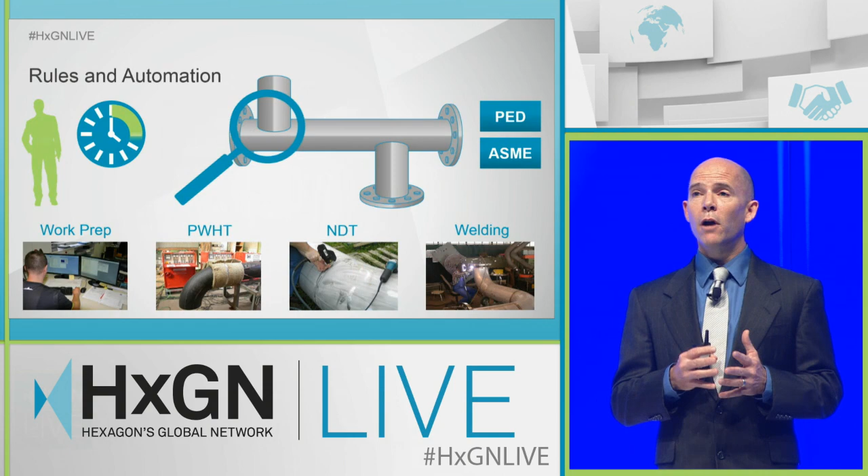However, that's only part of the problem with these spool drawings. There's a wide array of other documentation required to get those spools to the site. We have to pay attention to industry requirements, work prep, post-weld heat treat processes, non-destructive testing processes and documentation, as well as a lot of welding documentation and plans.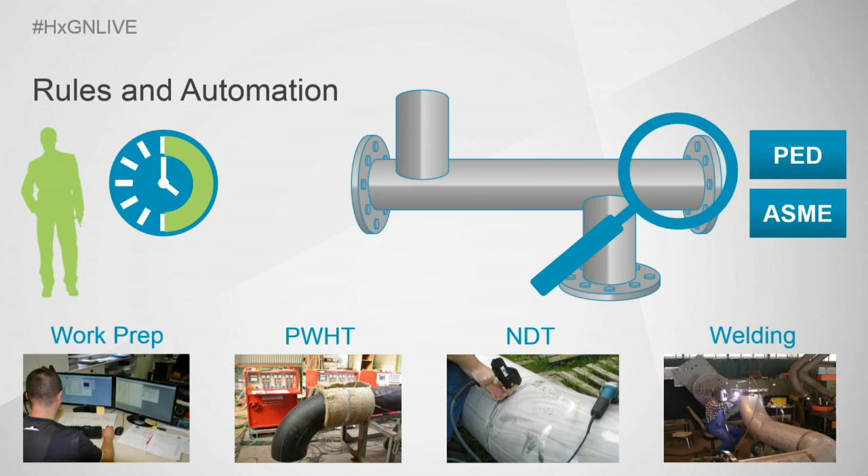All of this requires a lot of rules, and all of this can be automated so that instead of the specialist doing it manually every time, we can automate that so the specialist can focus on the right thing. It's better if that specialist focuses on writing and configuring rules in the system rather than creating a lot of manual documentation.

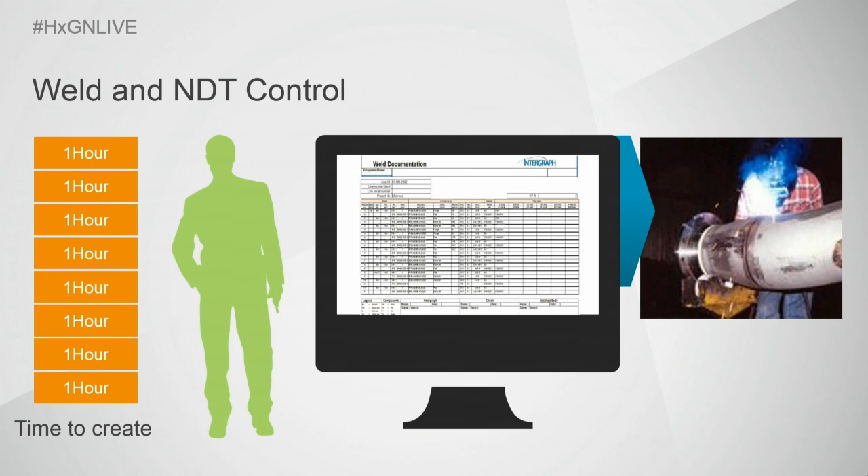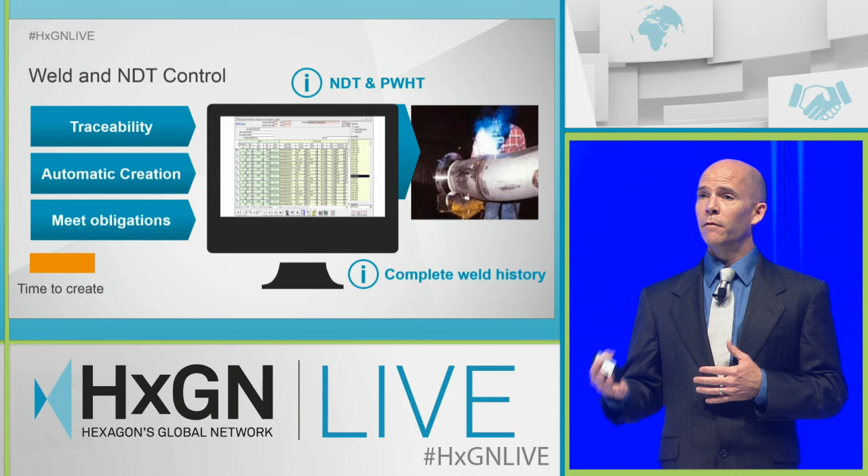That's what happens today with welding and non-destructive testing. By using SmartPlant SpoolGen Plus, we can take all the hours a specialist would spend indicating and documenting that manually, and now automate it. Using the rules programmed into the system by the specialist, we have automatic creation of a tremendous amount of documentation, with a much clearer history of what was done and a clearer view on progress, so we can do good progress tracking. This helps the fabricator meet obligations and provides great traceability.

Now, many of you are probably not familiar with just how incredible the documentation is for a single spool. Fabricators tell us that depending on job requirements, there are anywhere from 10 to 20 supporting documents per spool that have to be created in addition to the spool drawing. So you can do the math quickly: if there are 2 to 5 spools per isometric, you're talking 20 to 100 manual documents that have to be created for every single spool shipped and received on site.

That's where SpoolGen Plus comes into play. Most of that can be automated using rules and automation in the system. We can really leverage the knowledge of that specialist to make them more productive and make the company more productive as a result.

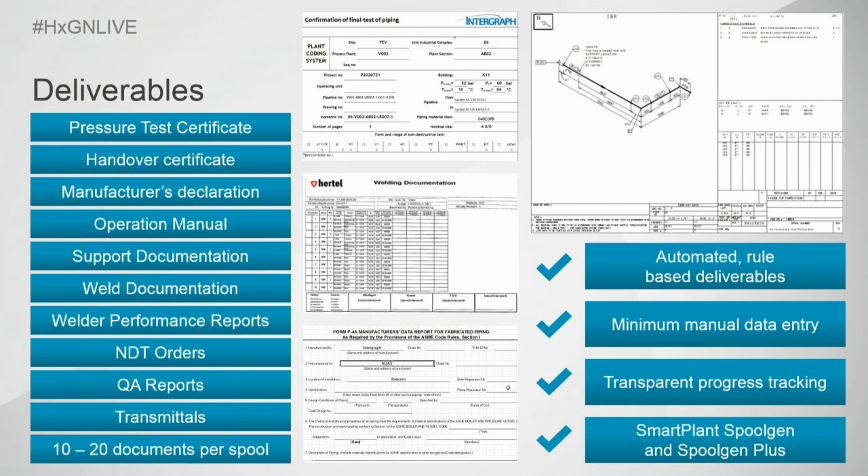There's one thing to talk about this from a theory point of view, but what's most important is what clients say. Andrei Kosel of IMR Hamburg said it best when he said they're saving 10 hours per isometric by using SpoolGen Plus, and they intend to incorporate that on all of the work going forward. That's the kind of productivity that really matters.

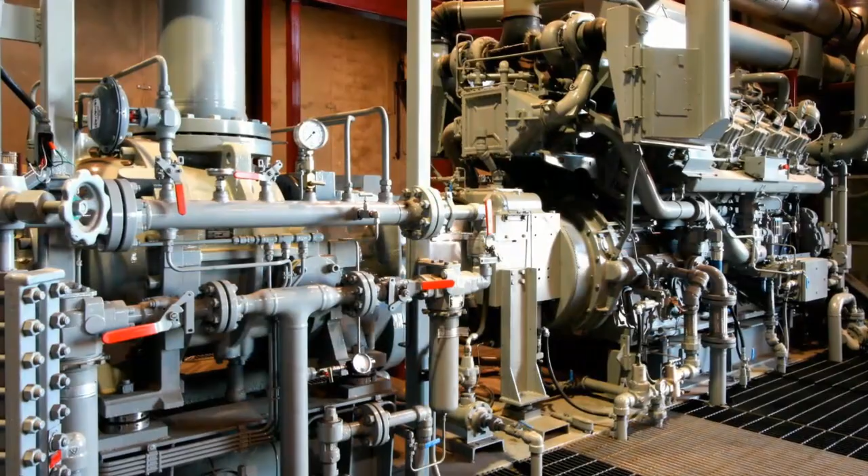Well, we've made the decision to move our asset document and data to a system that enables integration of our design processes and configuration control processes. This should enable our operating assets to align the real design-based information with the asset information as used by maintainers.

The same approach will be implemented on our new build projects with a specific focus to achieve a well-integrated data-centric design environment that will form part of the handover requirements of assets to our operating units.

So now let's talk about SmartPlant Fusion, which is one of our newer products, and the challenge of managing unstructured information. By unstructured, I'm really talking about unintelligent formats like scanned documents, PDFs, images that are scattered around in unofficial storage locations in your offices.

Information that's actually shared informally, and that creates a lot of duplicates and outdated versions. Some documents actually only exist probably in paper format.

Managing unstructured information is a challenge that's shared by both EPCs and owners. The EPCs have to deal with the continuous flow of information from suppliers, contractors, and vendors. Tens of thousands of documents on a particular project which have to be validated each time. They have to be organized and set up for eventual handover to the owner.

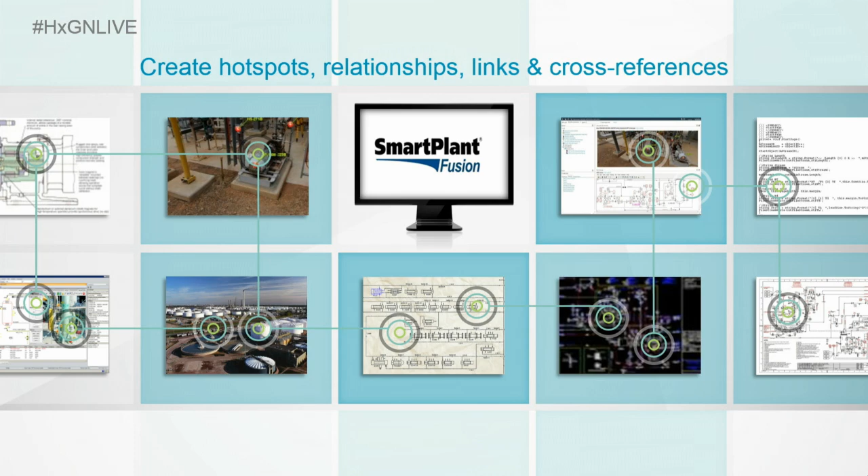SmartPlant Fusion automatically extracts the intelligence and establishes links between those documents. It provides a really nice, intuitive navigation using 3D models or high-definition surveys or just tagged information. It provides a single point of access for all of your plant information. And nicely enough, it makes it very easy to find that information should that emergency situation occur.

Fusion deploys in a matter of weeks. Like I said, they had it in production in less than 6 weeks. It's used by EPCs and owners alike, and it's going to help you achieve some really significant business value. So I hope if you have not heard of it yet, this is something you want to check out.

Thanks, Melanie. You know, some of our customers are actually looking at using Fusion in the cloud. Right. I'd like to talk a little bit about what we've been working on with Smart Plant Cloud.

A couple of years ago, I shared with you our plans for what we were going to do with Smart Plant Cloud. And last year, we've built out the infrastructure. We've done extensive testing with Shell and with other engineering contractors.

I'd just like to take a second and congratulate Egbert Stout, who received the award yesterday from Ola and Gerhard on shaping change. They've made a huge impact in our industry working with us.

Now, in 2014, we're growing and we're resourced and we're running structured processes that will ensure a successful service delivery. We have data centers in New York, Dublin, and Tokyo, and we're expanding these into South America, the Middle East, India, and Australia as you need them for projects and work locations.

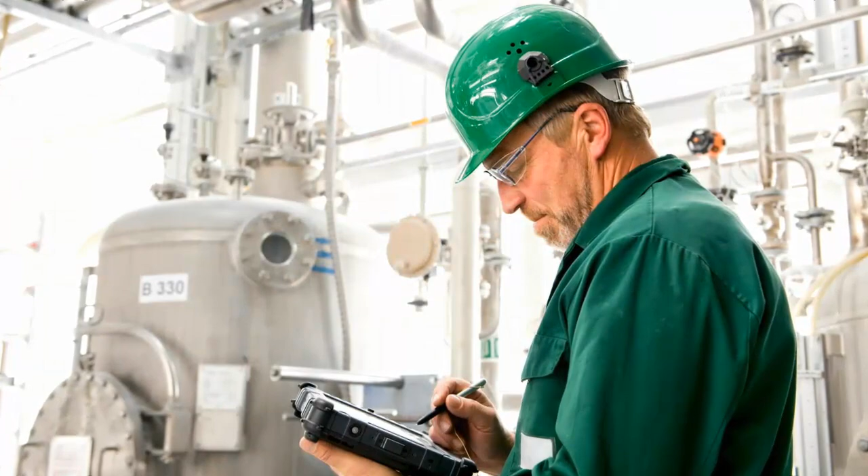It's really up to us to provide that fast response, a complete response to any issues that arise during project execution. And Intergraph luckily has been there with us to help provide that support. Smart Support is one of those tools that we rely on to provide that to our projects.

So all of us at Intergraph, starting with Gerhard, believe that having great support after the sale and during the lifetime of your using our products is critical to our business success, just as it is to yours.

This is why this year we rolled out our new online Smart Support website that has a knowledge base that is rated #1 by Gartner in the industry. It's available 24/7 because that's how you execute your projects.

And so, you know, if you've ever had one of those late nights when you're by yourself and you just can't remember how to do things, but you're up against some deadlines, like I was with PowerPoint this past week, then you're not alone. The Smart Support online knowledge base is there for you.

As you enter your question, it's going to be providing you with the top-rated answers as you type. So this is going to allow you to concentrate on a lot more important things like getting the job done and getting it done correctly, and getting home.

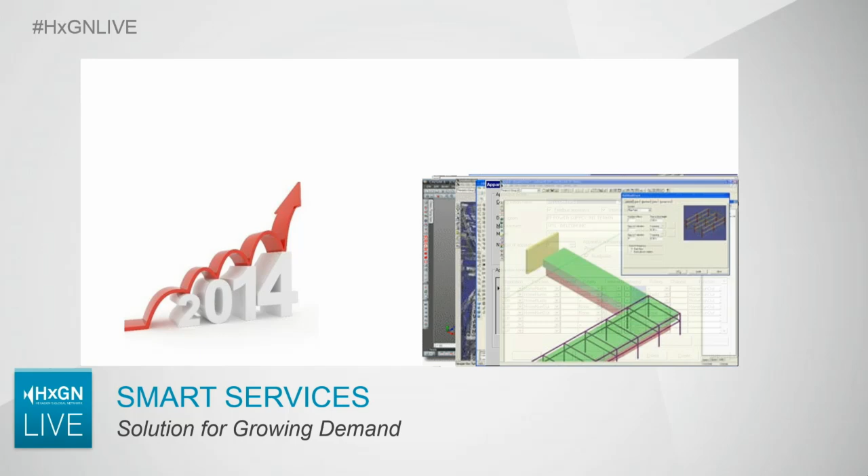Since the last several years, we've seen a steady growth in demand for our services in order to do these things. Our business is becoming more complicated, both because projects are becoming more complicated and because people are becoming more advanced with the use of technology in these large mega projects.

One of the things our services management did was implement a global methodology that would be standard across the world so they could all work together and have similar communication, called the Global Professional Services Methodology, or GPSM. It's pretty straightforward, and all it does is make sure we have alignment with client expectations, working team scope, and our quality assurance programs in the final delivery back to the client in order to meet expectations.

We implemented this a couple of years ago, but we waited to start marketing it until we could show you the results. Client satisfaction surveys show us that we're making a difference with this focus on our services quality, in order to deliver more effectively and meet expectations on a more predictable basis. We really appreciate all the clients that have worked with us to augment and hone this process.

Now I'd like to talk a little bit about you, and specifically some of the entries we had for Golden Valve and Platinum Pipe. Right now we're going to talk about a couple of the big winners in this area. The first one is Best in Show.

This is from ECM SA Projetos Industriais of Brazil. If you go down to the show floor and look, you'll see a spectacular visualization of one of their 3D models, and all the judges who saw it were really impressed. So a quick round of applause for ECM SA Projetos.

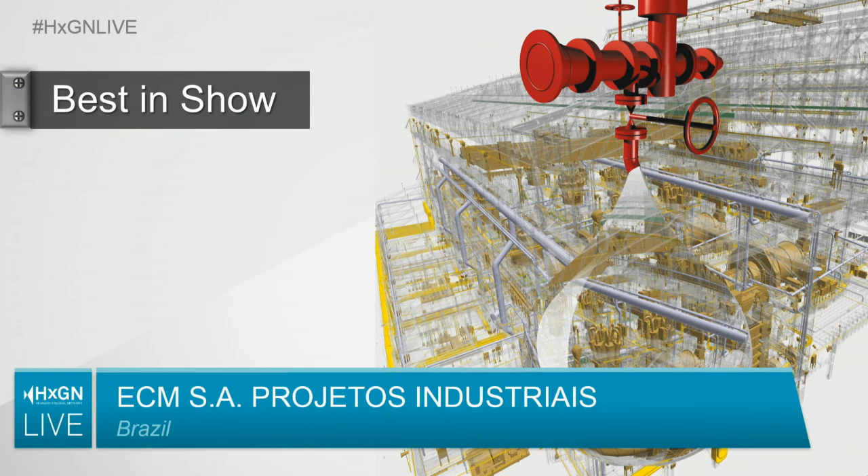Next, I'd like to show you the winner of our Platinum Pipe Award. That's the Platinum Pipe Automation Award in Engineering and Schematics, and it goes to SNERDI of China, who used automation to begin automating much of the manual things they were doing in smart plant instrumentation. Please give a quick round of applause for SNERDI.

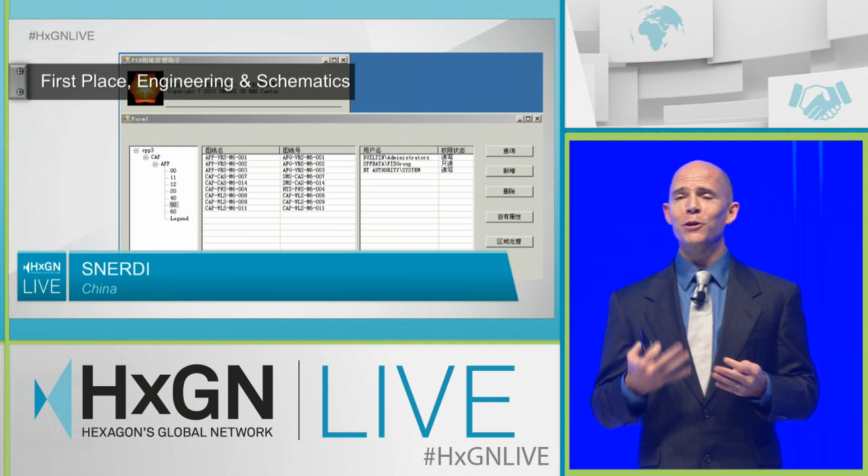Thank you. By the way, we've had many entries into these awards, and I can tell you our judges were quite tired and almost afraid to announce the winner for fear of dealing with the disappointment, but we do appreciate all of the entries that were put in.

Finally, I'd like to call attention to the winner of the 3D Platinum Pipe Automation Award, and that goes to Promon Engenharia, also of Brazil. So a quick round of applause for Promon. Thank you, and thanks to all of you who made entries.

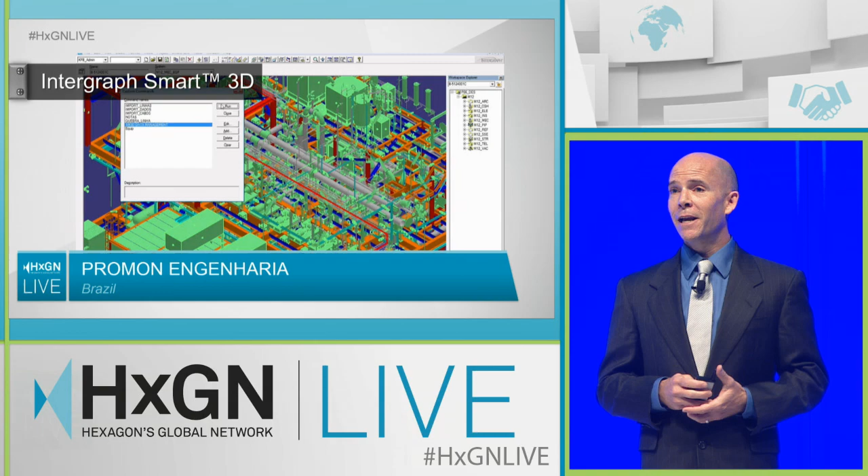Our judges were really impressed at some of the things being done with our technology. Go out to the expo floor and you can learn more about many of those.

And now in closing, I'd like to simply close with a quote from my boss, our president, Gerhard. I'll let you know that we will never, ever forget our rule number one at Intergraph, which is we never, ever let a customer down. Thank you.

Have a good day. Bye-bye. Where's the music? Thank you. Thanks.

Engineering information is a valuable asset. Engineering information can save lives, accelerate revenue, and protect your license to operate while reducing your capital expenditure and operating costs. How do we generate high-quality engineering information from large plants that have been operating for decades, where the existing engineering information is often unstructured and paper-based?